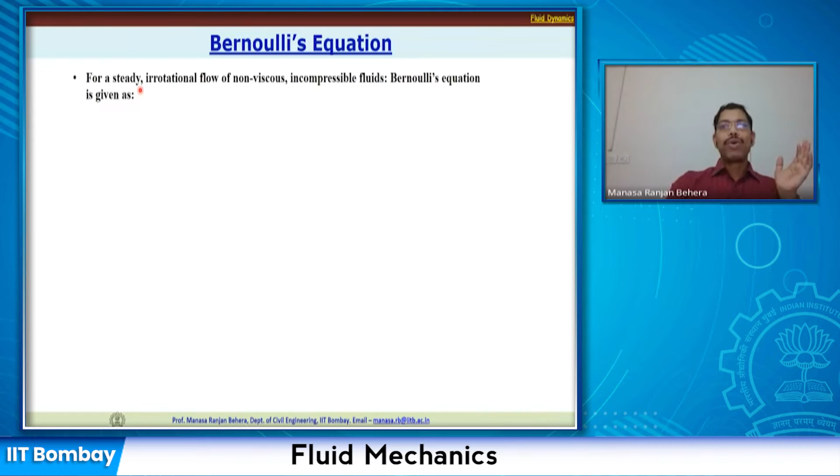So, for a steady irrotational flow of non-viscous incompressible fluid, we have already seen the previous equation, and now we are talking about a steady irrotational flow of non-viscous incompressible fluid. All this incompressible, non-viscous, irrotational we have already seen. Now we are telling it's a steady flow. The moment we say steady flow, what will happen to this term dou phi by dou t? Once it is steady, there is no change in time. So if there is no change in time, this term will disappear or it will vanish.

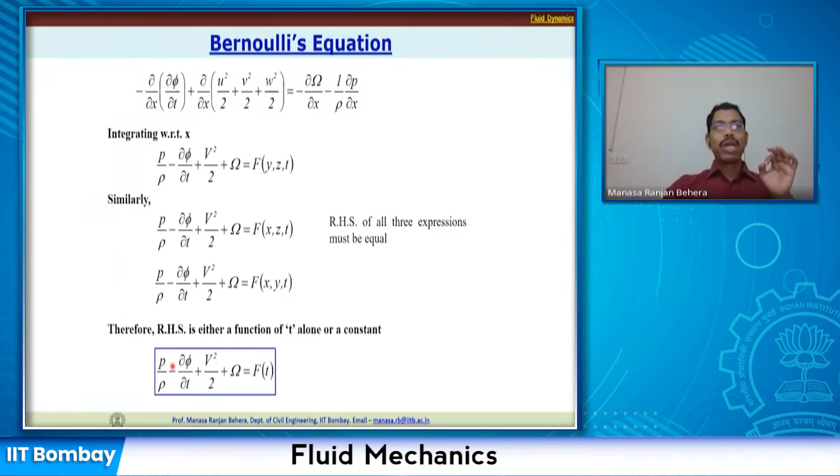It goes to 0. Now what we have is only this, that is P by rho plus V square by 2 plus gH is nothing but constant C. Alright. So now if you look at, this is your pressure divided by rho, velocity square by 2, plus gH is nothing but your potential energy. So that is equal to constant. And if you take any 2 points in a flow without considering the losses, this term is going to remain same. It's going to be constant.

So in other words, we can write down P by rho g plus, I'll divide by g at all the places. We can write down P by rho g plus V square by 2g plus H is equal to constant H. So now what is this 1 by 2 V square by g? It's almost equivalent to, if you look at, half mv square. So it's a kinetic energy. This is your pressure energy and this is the potential energy. And that gives rise to your total energy.

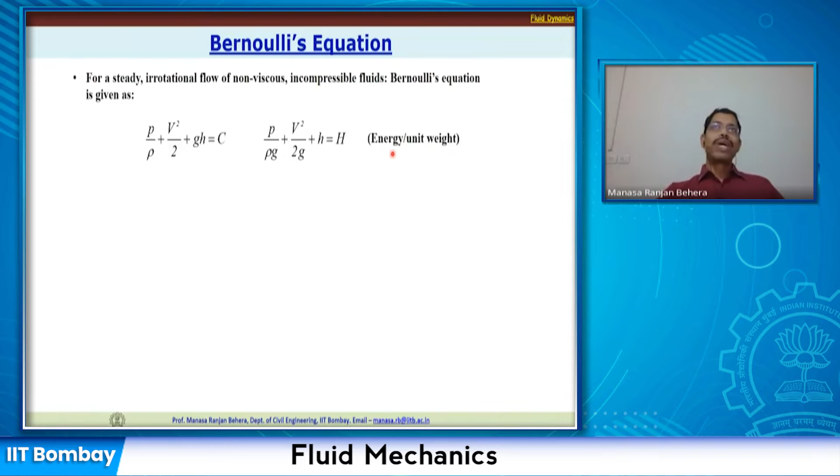But here what we are writing is in terms of heads. So it is nothing but your energy per unit weight. What we are writing is energy per unit weight and we are getting it in terms of head. So the first term P by rho g is called as pressure head. Second, V square by 2g is called as velocity head, or that's nothing but your kinetic energy per unit weight. Similarly, the potential energy is nothing but your datum head, so potential energy per unit weight. And all three together are going to give you the total head available at a particular point.

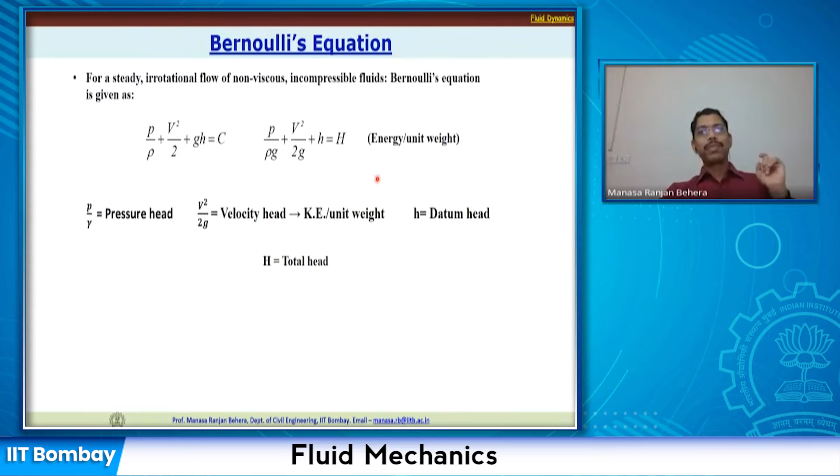So as I said, the pressure difference P2 by gamma minus P1 by gamma, let us say there are 2 points 1 and 2, the fluid is moving from point 1 to point 2. The pressure difference P2 by gamma minus P1 by gamma represents the energy spent by the pressure force in moving 1 unit weight of fluid from point 1 to point 2. So that is the energy spent, whether it is pressure energy or kinetic energy or potential energy, it is the energy spent for moving 1 unit weight of fluid from one point to another point.

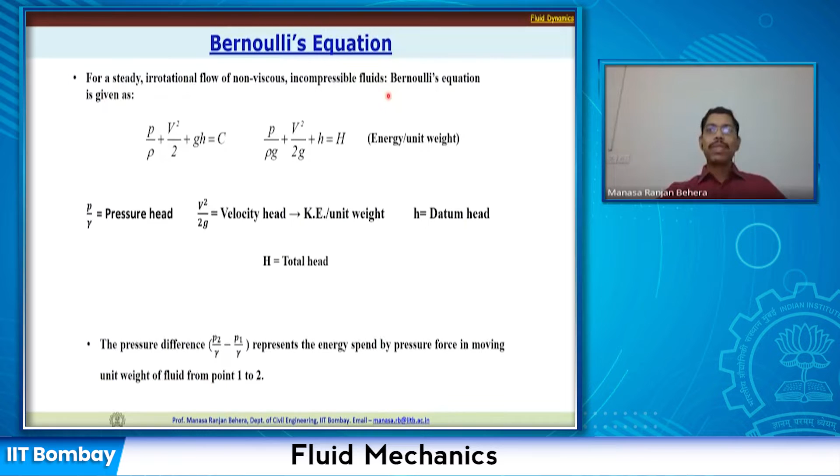Alright, so this is Bernoulli's equation, and this equation is very, very important and you can apply it to solve many problems given that the conditions are satisfied, which you should always keep in mind. Now let us look at some of the applications of this Bernoulli's equation. Application to real fluid flows can also be done, although we have derived this for ideal fluid scenarios or inviscid flows, based on Euler's equation.

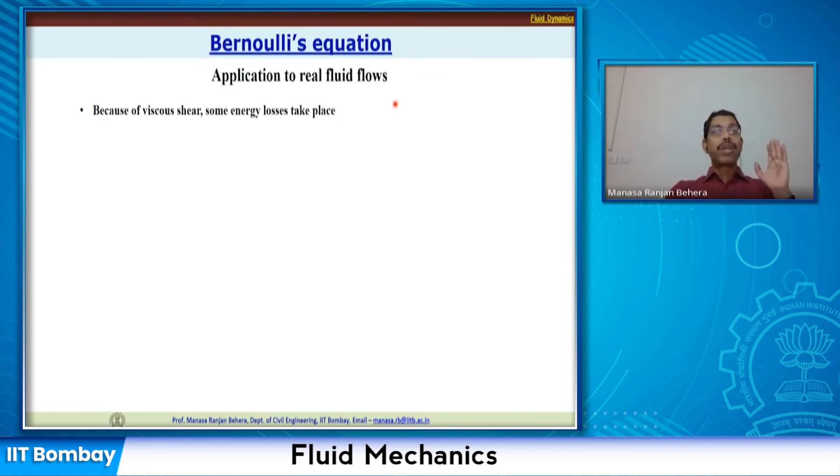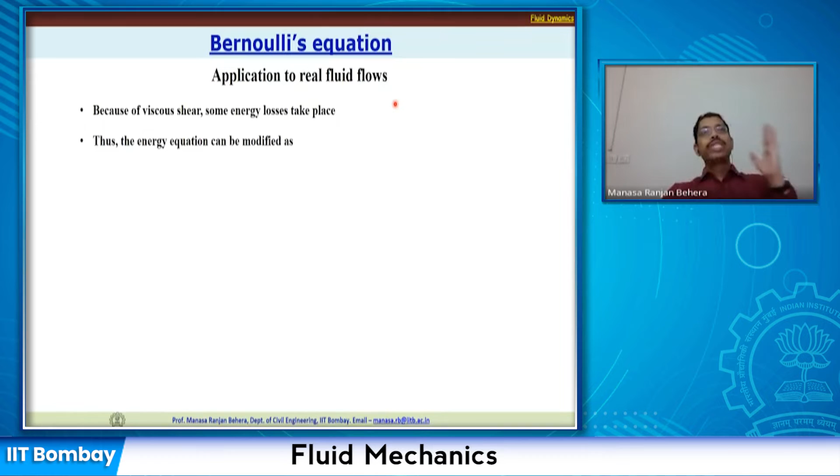Still, this Bernoulli's equation can be applied to real fluid flows, assuming that the flow is inviscid, and later we can do some corrections. Basically, because of viscous shear, some energy losses are going to take place. So there will be some loss, and in Bernoulli's equation we have not considered that. So the energy equation you can modify. We said that if it moves from one point to another point the energy is going to remain constant, but no, it is not going to remain constant.

If we want to equate, the total head at point 1 is equal to total head at point 2 plus some energy loss that has happened over the distance while it is moving. So now once we write it down, it is important we find out what is that head loss.

So we'll see how do we find out head loss for different types of problems. Basically head loss cannot be found beforehand. You cannot find out beforehand. You basically assume that there is no head loss, or neglect it, do the analysis and obtain one approximate solution. Once you obtain the approximate solution, then you modify the results by introducing some kind of coefficients.

So maybe in a laboratory condition, you exactly know theoretically what you should have got. With the real fluid, you got some value. So you know the difference, or the coefficient that you can find out by taking the ratio. That coefficient can be used for further applications. We'll see a lot of these applications as we move on to the next lectures. But right now, at least we should understand that the Bernoulli's equation can be applied.

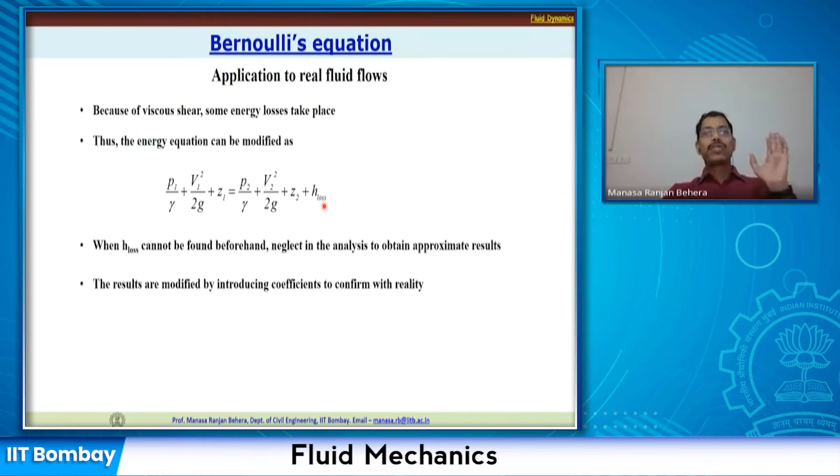So it may be applied without much error for gradually varying unsteady flow. As I said, for steady flow, you can assume and correct it, but this can also be applied for unsteady flow, but for gradually varying. If it is rapidly varying flow, there is a sudden change and temporally it is changing quite fast, then it may not give you a very good result, but for gradually varying flow, you can still apply it without much error.

Now for flows of gases where the change in pressure is a small fraction of the absolute pressure, the fluid may be treated as incompressible. So we said that Bernoulli's equation is applicable for incompressible flows, and gas is compressible. But in case the compressibility effect is not really much with respect to the absolute pressure, if the change is not really much, then we can still consider the fluid as incompressible and apply Bernoulli's equation for that flow.

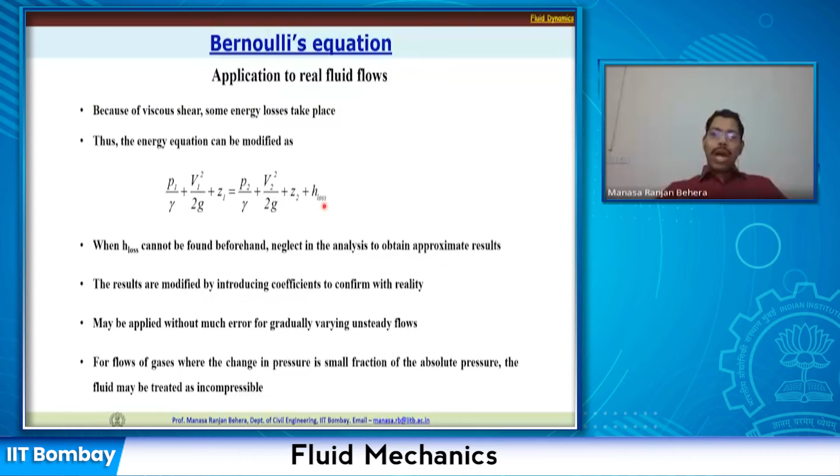So it depends from problem to problem, and you have to understand what is really happening and then apply the theories or the concepts; only then is it going to be correct. You should not be applying them arbitrarily. All right. Now having understood different heads, let us look at some other terminology. Here I'm trying to explain two terms: one is total energy line and one is hydraulic gradient line.

So if I find out the total energy at this point, I'll take the pressure head plus velocity head plus datum head. All three together are going to give me the total energy. So if there is a tank and there is a flow through a pipe and there are some changes in the pipe diameters, contraction, expansion and so on, there is going to be some loss all through this path. As the fluid moves all the way, there will be some losses.

There will be pipe entry loss, friction loss, contraction, expansion, all these losses are there, but the energy at any point, including the pressure head, velocity head and datum head, is going to give you the total energy at that point, and if you join these, you will get the total energy line.

Now similarly, if I subtract or don't consider the velocity head, then the line that I could draw is going to be called the hydraulic gradient line. So the hydraulic gradient line is nothing but your datum head plus the pressure head. These two are going to give you the hydraulic gradient line.

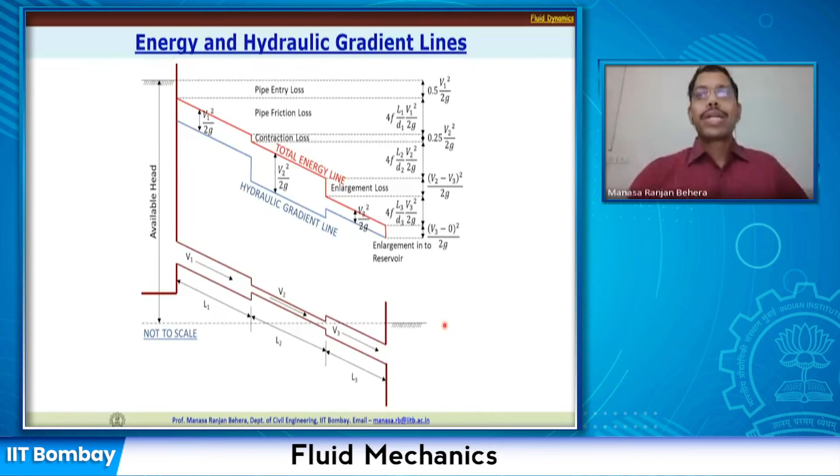People used to use some kind of pipe in the drum and then suck it at the bottom, and then once the flow starts flowing, they leave it to a drum which is kept at a lower elevation. That's nothing but your siphonic action. So it works very well, and people have been using it frequently.

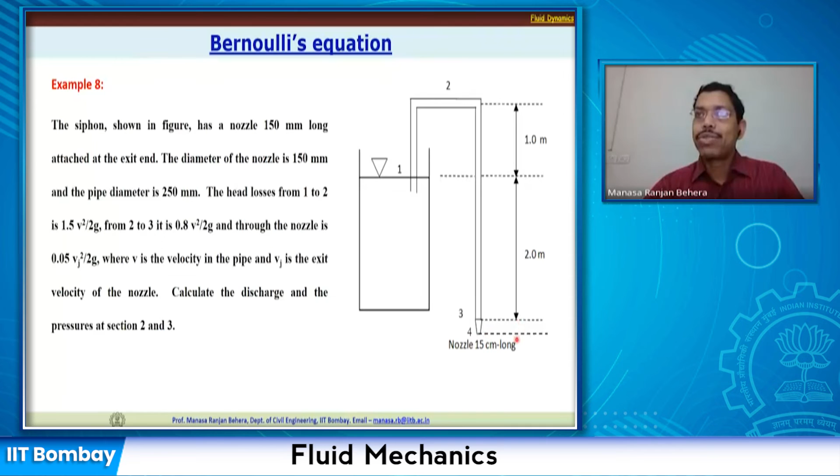Okay, so let me say this point is considered 0, below that the nozzle end level is negative, and above this is positive. Now if we apply the Bernoulli's equation between section 1 and 4: P1 by gamma plus V1 square by 2g plus Z1 is equal to P4 by gamma plus Vj square by 2g plus Z4 plus head loss. Yes, you have to consider the head loss.

Okay. Now with this expression, let us start substituting. We already know P1 is equal to 0, that is atmospheric pressure, since we are talking in terms of gauge pressure. V1 is very negligible, so it is considered 0. P4 is also 0. Pressure at the nozzle exit is atmospheric again, so it is 0.

So substituting all these values, we can write down Z1 is equals to Vj square by 2g plus all the head losses, and the datum Z4 is nothing but minus 0.15. So from here it is negative. So now here if you look at, there are two unknowns, V and Vj, and finally you could write down the expression for Vj in terms of V, and g is there, you can always substitute the value.

So now here we will apply the continuity equation, because at these two sections, whatever flow is coming in at section 1, the same flow is going out, so discharge remains same. So we can write down A1 V1 equals to A4 V4. Applying the continuity equation between section 2 and 4, or 1 and 4, doesn't matter. Sometimes 1 gets confused with the whole section, so let us say 2 and 4.

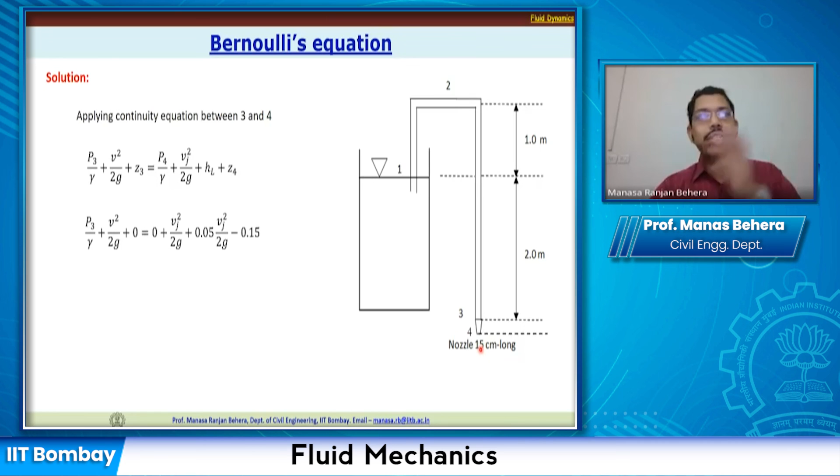Now let us look at the other question, what is the pressure at point 3. Apply the Bernoulli equation between point 4 and 3, and substitute all the values. We already know Z is 0 here and the pressure is 0 at point 4, so you will be able to write down the pressure at P3, which is going to be 1.308 meter. That's the gauge pressure.

So this is how you apply the Bernoulli equation to various problems and find out the pressure or velocity. These are basically correlations between the pressure, velocity, and the datum, so all three you can find out for a problem by using the Bernoulli equation. So with this, we'll stop the class here.